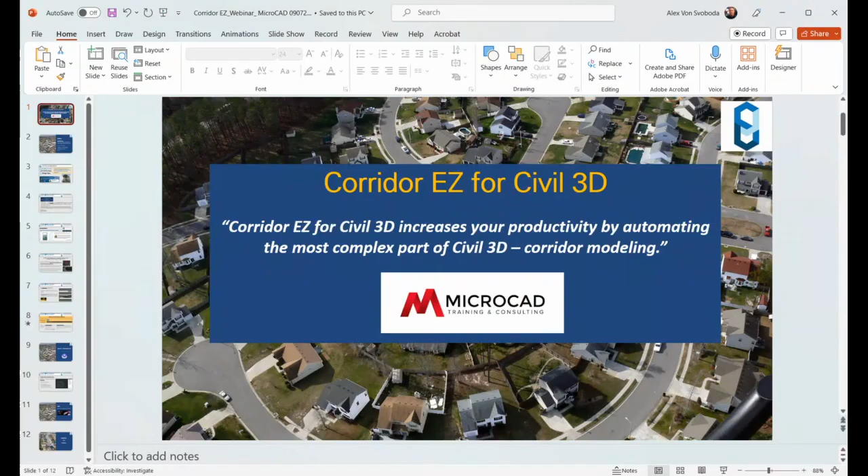All right, thank you Juliana. We're ready to go with this exciting presentation. Let me switch over and hopefully everybody will be able to see the screen here. You can confirm with that. I'm going to go to full screen right now. Yep, you got it? Okay.

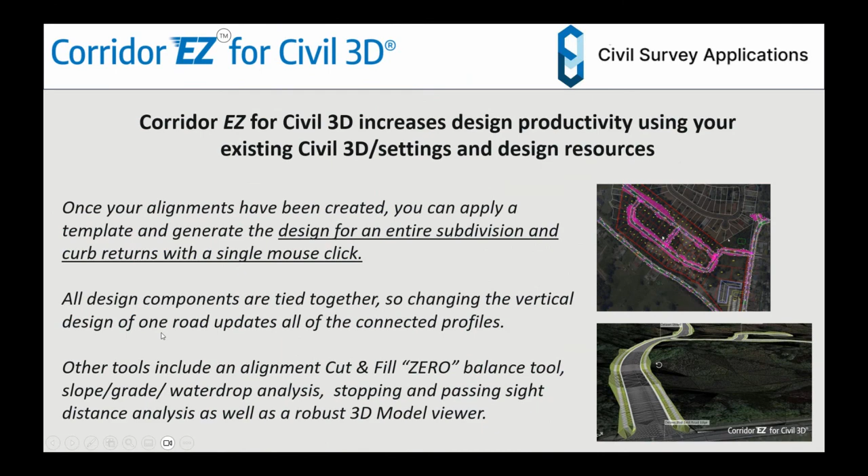The big thing is if you've got multiple monitors, you can place all the different screens - your profiles, cross sections, your 3D rendering, all the different screens - and work and see as you make changes, see everything update directly from that. So in our model viewer, it does real-time visualization as you do your design.

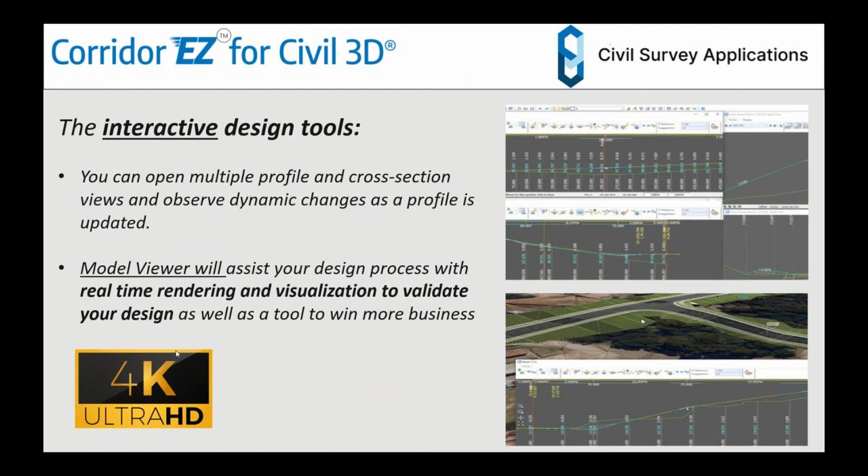One of the newest things we've just added here is our software is 4K monitor compliant. So all the dialog boxes and things will react properly in a 4K environment.

So again, you can go through here and make changes in CorridorEZ, have everything update automatically. That's the power, so it works just like Civil 3D.

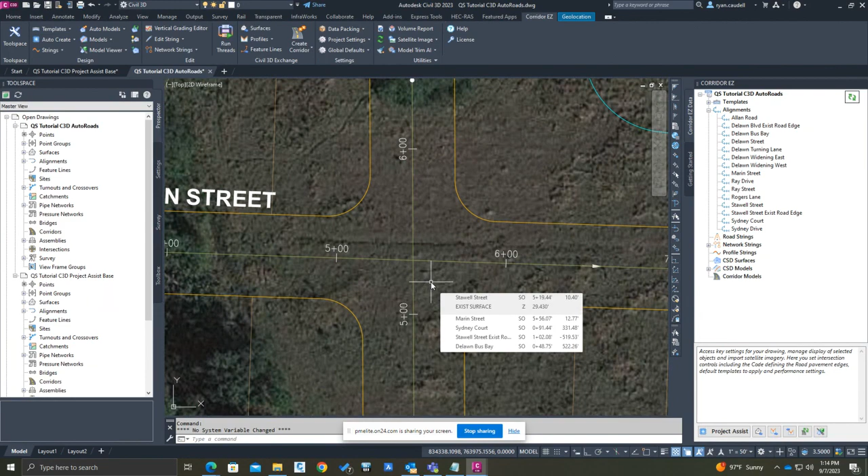As we talk about the alignments, some key things about the way the alignments need to be configured: if you're modeling a T intersection, you would have your alignment basically going perpendicular to the other main road alignment, or in the case of a four-way intersection, two crossing alignments. Those are the requirements for the software to be able to model your intersections correctly.

Some other items would be such as, I've got a right turn lane, and you'll notice that in the alignment name, I'm calling it a turning lane. I've got a bus bay, and if I hover over that, you can see that I'm indicating that alignment as being a bus bay. So you just call out the alignments as they are.

I'm going to go ahead and give you a quick example before we get to the Project Assist part of the software. Over to the right in the tool space, as I was saying, you can right click on the main heading here, and you'll see that you've got drawing settings. You've got a place to set your Civil 3D styles. I can keep going down to the bottom.

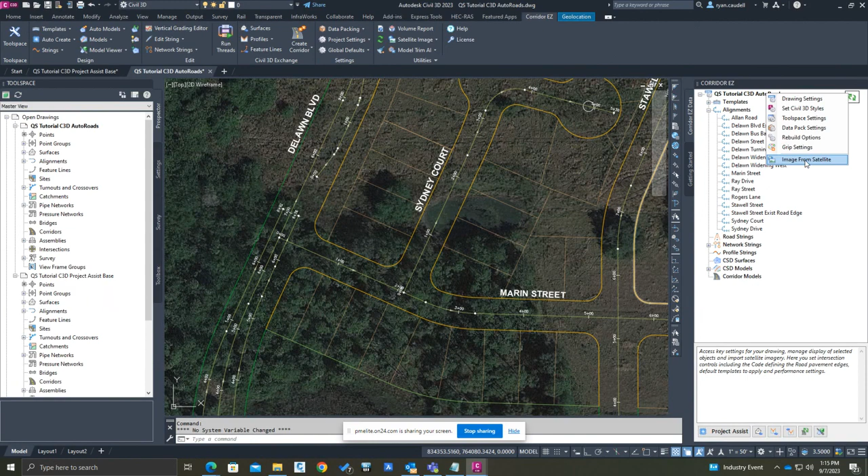You can even import Google imagery, Bing imagery, or even if you have a Nearmap subscription, you can plug that in and pull imagery from that as well. So that's actually where I got this image in the background.

Now the next item that you would normally think about is your templates, your cross sections of the roads. Similar to Civil 3D, where we've got basically where we would create assemblies, this is the same representation in CorridorEZ as templates. So as I kind of go through the templates, I'm getting a nice preview.

If there's a template I need to go and modify, I can right click, edit template, and wait for the window to pop up. There's so much you can do in here that, again, this is kind of a high level presentation. So we've got pretty much 4 different areas that you can look at in this window. We've got a left side and a right side, basically to build out your left and your right of the template. All the controls to building the template out is here on the right side.

You've got create section, which would be your pavement. You can create curb, which would build out your curbs. You've got daylighting conditions left and right. You've got template options. There's so much you can do here. You can access all your different templates also from this window, or you can even click through each one.

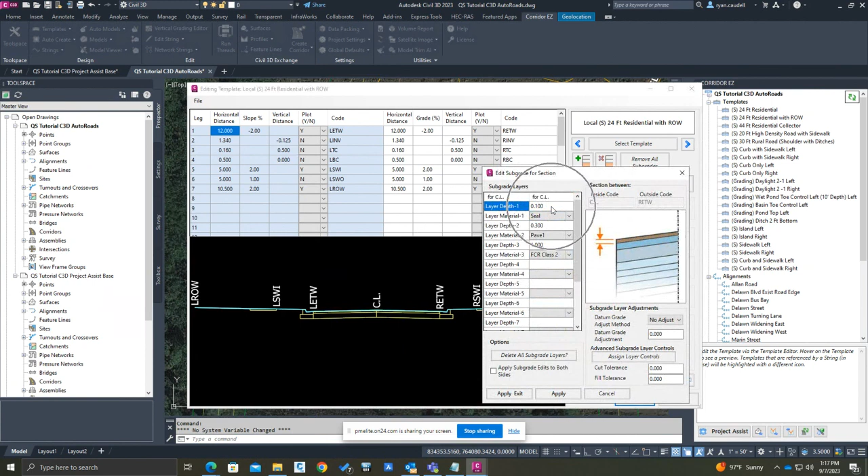Probably the last thing I'll point out here is that you can also right click and do stuff like edit the section. So now you're editing the vertical information on this template. You can assign materials, and this is completely customizable to the company needs and the standards that they're in, in the region that they're in.

To learn more about this, if you install a trial of CorridorEZ, keep an eye out for these little icons here that look like an old video recorder. That gets you to all the e-learning on the specific tools that's in here. So I'm going to go ahead and cancel this.

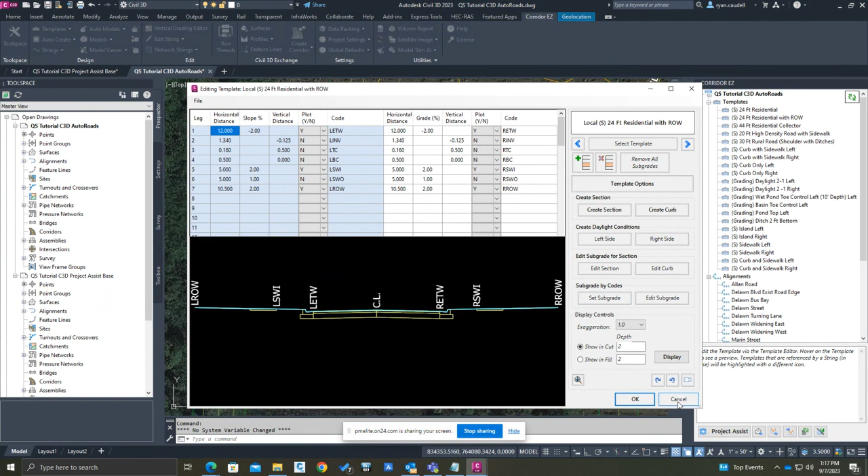Now the next item are the alignments. You can see in the tool space here I've got a set of alignments, and as I hover over them, you can see they highlight on screen. They match the same list of alignments you see in Civil 3D because they are the same, so you've got the same list.

If you came after and created an alignment in Civil 3D, we've got this refresh button in the tool space that you can click, and it'll pull that back into the CorridorEZ tool space to work with. Now I'm going to go ahead and create a street, so if I right click on this particular alignment, I'm going to go to Create Road.

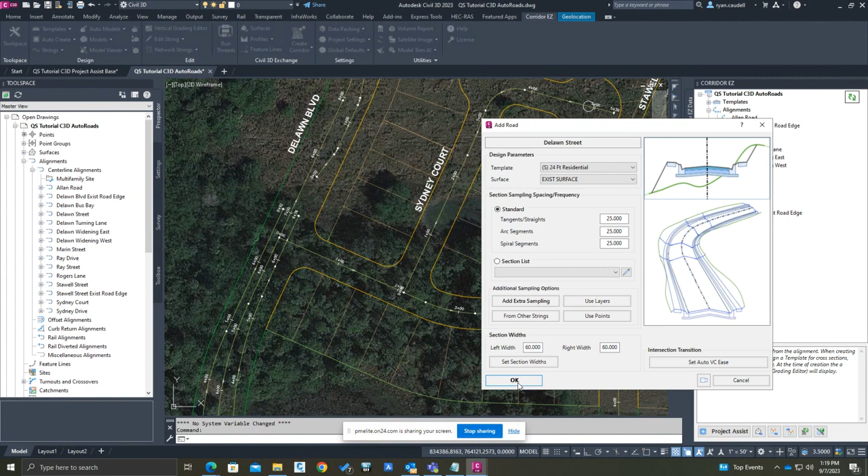You can see we've got that same library of templates. It's going to base your vertical design—you're going to get a best fit profile that's utilized off the existing surface. I'm just going to go ahead and click OK, running with the defaults.

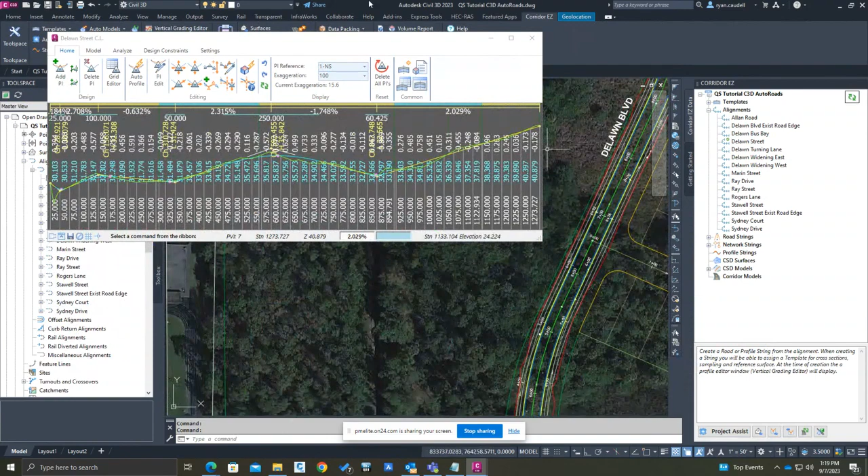As soon as that's generated, let me scoot stuff around—this is the fun part, like putting a puzzle together. There we go, so I've got a road string. A road string is tying together all the codes that were used in the template.

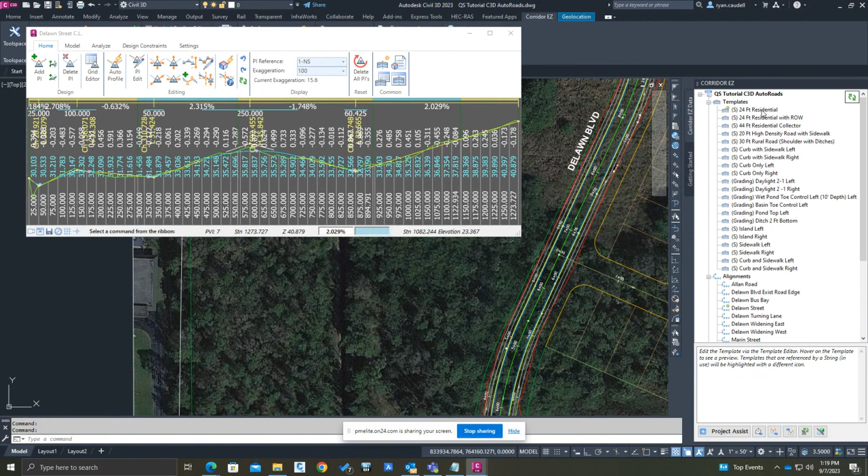When we talk about codes, you can kind of see them in the preview. Let's see if I can get that preview back. You'll notice there are these codes for the left and right of your template.

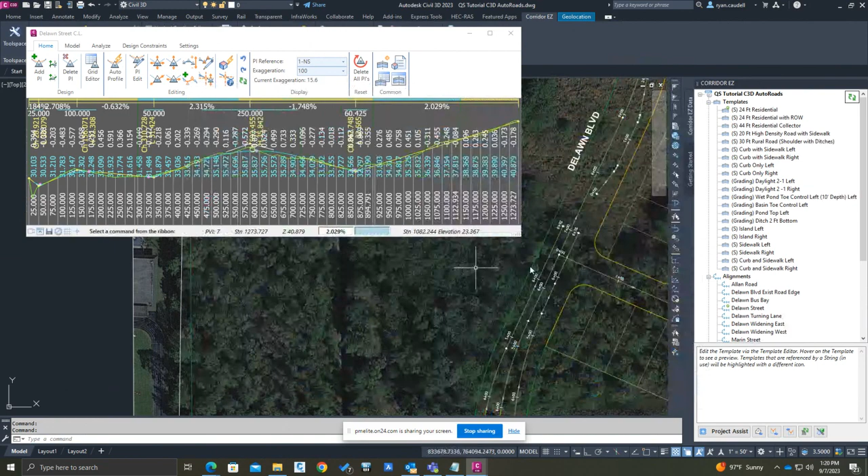And so we've got the center line—the first code, left and right, is an ETW, or edge of travel way. I've got certain codes turned off from the preview, but these codes string the line work together to make your road section.

And you can see that you've got your daylighting on the outside. Now if I go through my profile, you can see we've got a tracker—I'm tracking right in that intersection. I can go ahead and raise and lower this elevation, and whenever I place it, you'll see that model is now getting updated.

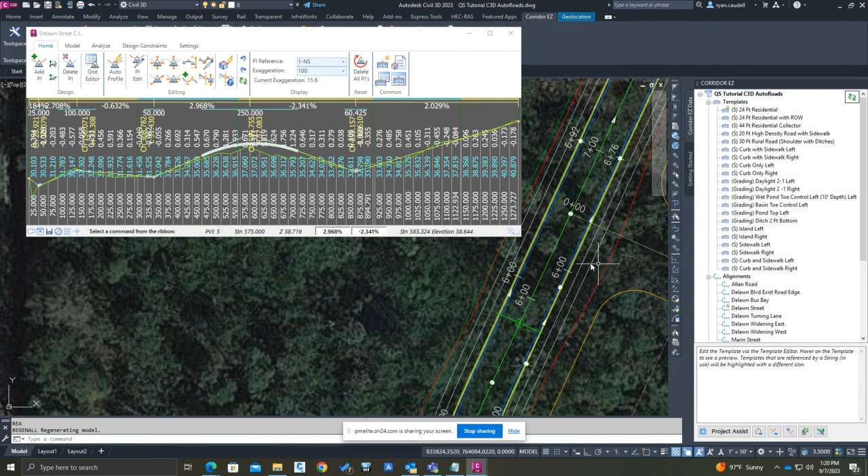With that change, I can also right click in this profile and see the change by section. So as I go in here and modify it, maybe if I get into a cut situation, I can pick that location point there, and you're seeing the changes here.

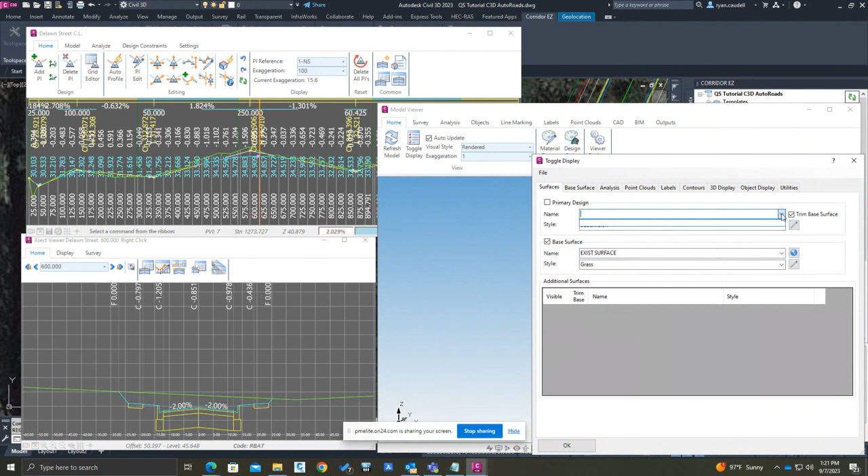Also, another way of looking at this is through the model viewer. I need to go ahead and get that surface—we have a surface being generated off the road. Let's go ahead and rebuild it. You'll see the contour show up here.

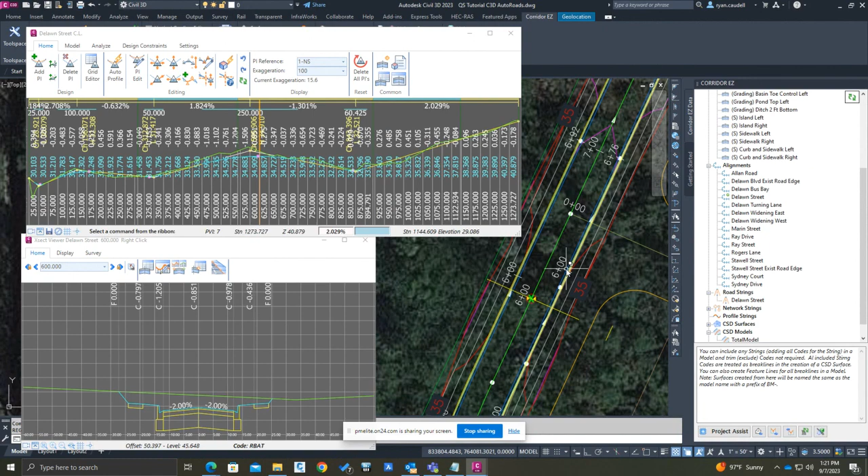So when I go back into the model viewer, we can have this open at the same time. Go ahead and turn that model on so we can see it—that's the road design we've got going on here. And if I raise and lower the model, if I create a fill, you see that even in the model viewer it raised everything up. So we've got a dynamic surface, and that includes even at intersections.

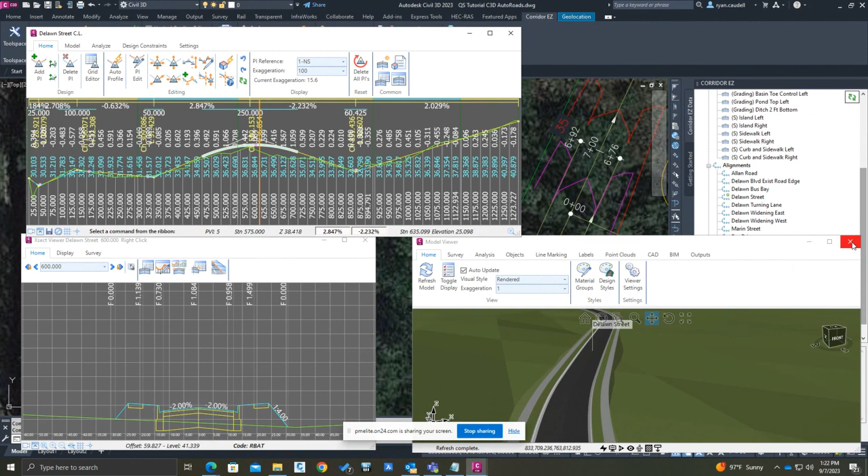I'm going to go ahead and generate one other road here real quick, and then we'll go into Project Assist. So if I get into Create Road, we've got another road design.

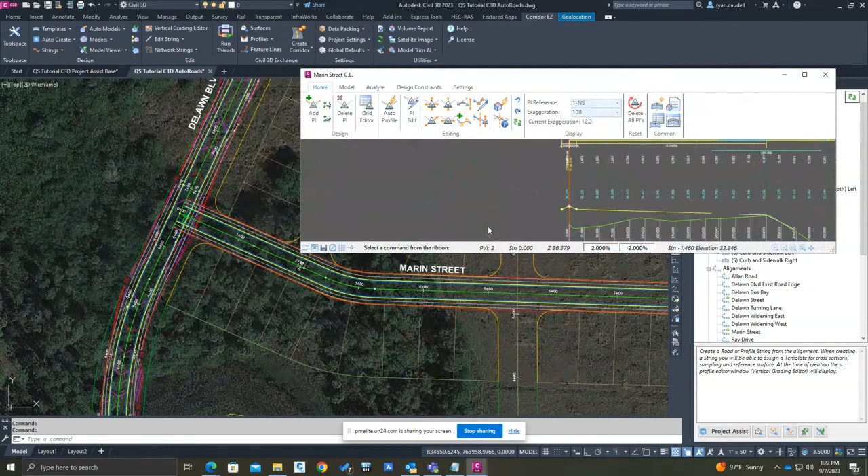At this intersection here, we can actually see that if I was to pull this other road, they would be linked together as well. But let me go ahead and also put in the intersection real quick.

So if I go in, that's going to be what we call a network string curb return. I can choose to do one curb return at a time. Close that vertical grading—all right, so we've got curb return.

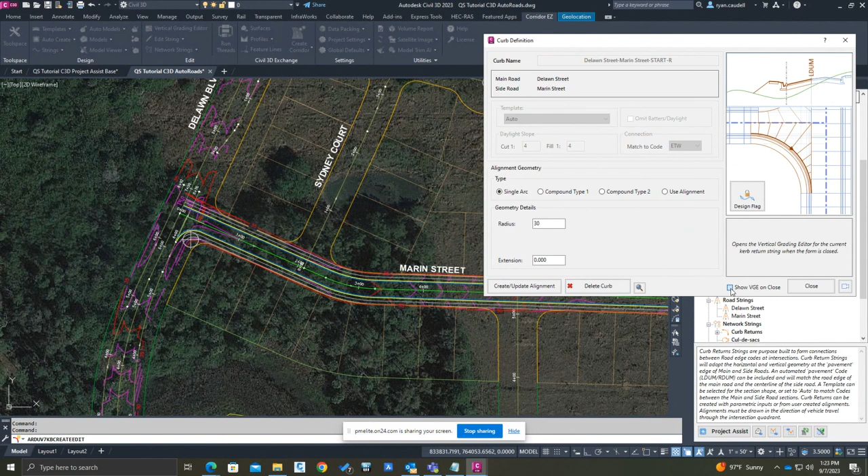So if I want to do this one quadrant right here, I can set my radius. You'll notice how it's creating the alignment and doing a design at that intersection. And if I wanted to see it in the vertical grading editor, I go ahead and tick that box on, and I can see how that intersection is tied to these two roads.

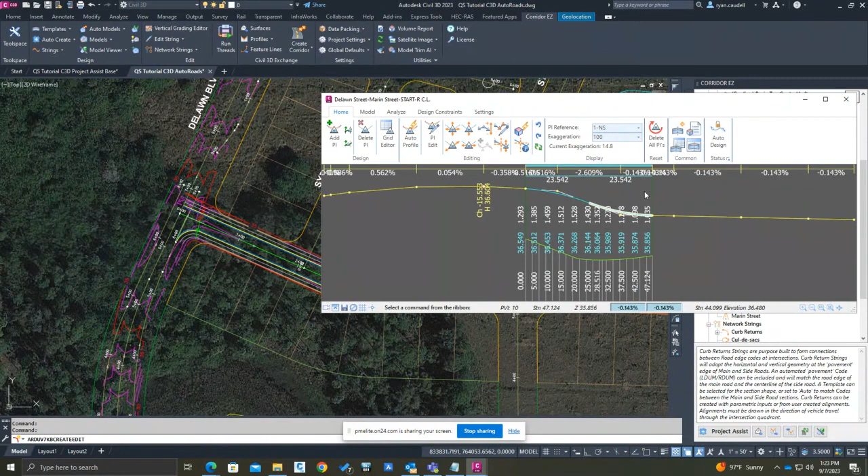Incoming, outgoing road at that intersection. And as I move my cursor around, I can actually see that tracker in the plan view of how that's going together. Now if you've got a lot of curb returns, then we could do auto curb return.

I'll find out where you're at. Oh, I'm still looped in the command. Sorry about that, let me get out of the command.

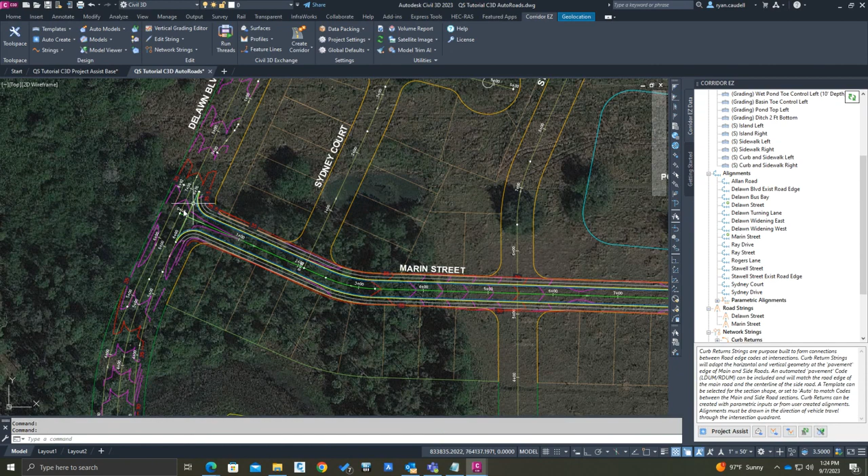Apply my radius so I can see it built that in. And if we take a look at that again in the model viewer, you've got a clean intersection here.

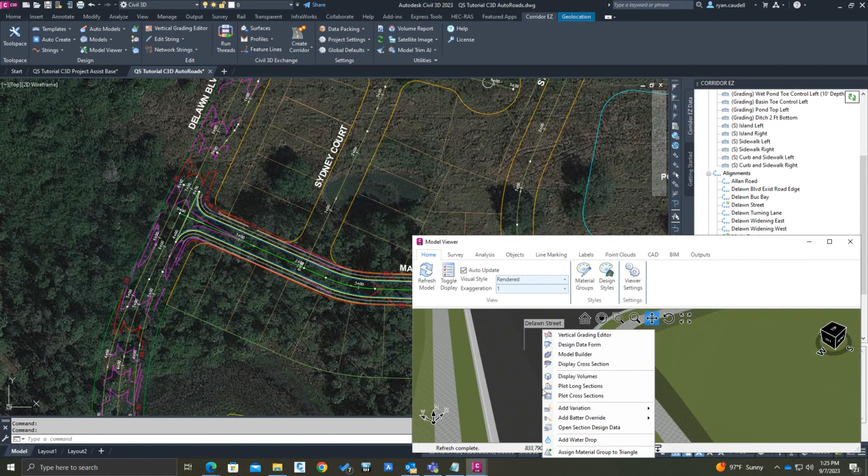Some of those water drop features, you can apply a water drop even in the viewer to see your high and low points. You can even go and access your profile information just by right clicking in the viewer, so you can get right back to your design.

If you want to get to the cross section, just right click away and you've got access to the cross section. Just to open up your mind a little bit, you can even right click in the section view, and you've got variations basically for targeting.

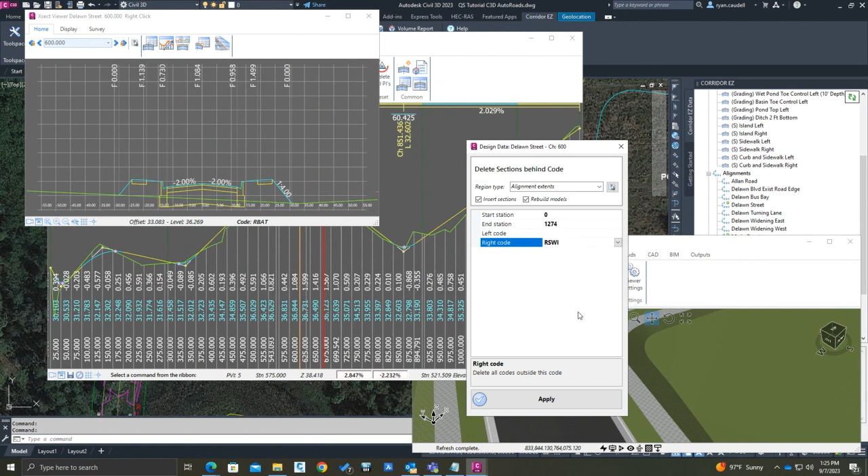If I wanted to delete the sidewalk on the right side, I can go ahead and say anything past my sidewalk end code, I want to remove it. You see I just dropped off that entire sidewalk, and there's the model that took that sidewalk out. So a lot of power that you can do in this.

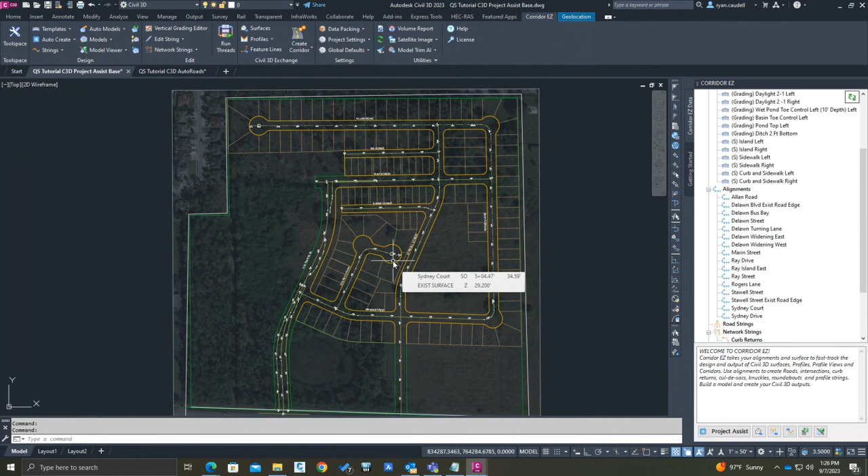Now this was just 2 roads, but let's go ahead and look at this as a mass project. I'm going to jump into Project Assist, and we've got all kinds of stuff going on in here. I want to build out my 2 cul-de-sac areas in this particular demonstration. I've got a widening, bus bay, right turn lane, even have an island. So let's go ahead and build this out.

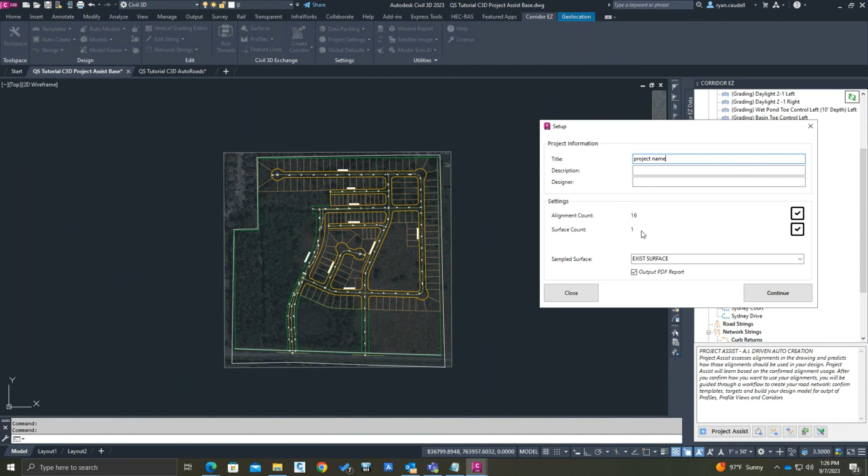So I'm going right into Project Assist. Here we can go ahead and plug in a project name. You can basically fill this out, and that's really for a PDF report that's going to be generated after it's done building. You'll see that it's finding that there's 16 Civil 3D alignments, and there's 1 existing ground surface. That's the surface. I'm just going to continue.

At this stage, Corridor EZ is looking at each of the alignments and then trying to assign a design type for each one. This is really the AI component. As you start to assign different tag words like widening, turning lane, bus bay, and you start assigning what type of an alignment in the design process you're going to use it as, all of this is getting stored in the memory of the machine learning portion of Corridor EZ.

So I'm at a point now where I don't even need to select anything, it's already selected. I will say though, as you hover around in here... well, I should see everything highlighted on the screen. There we go, now the highlight is starting to happen. You can highlight those different areas to see what alignment you're working in.

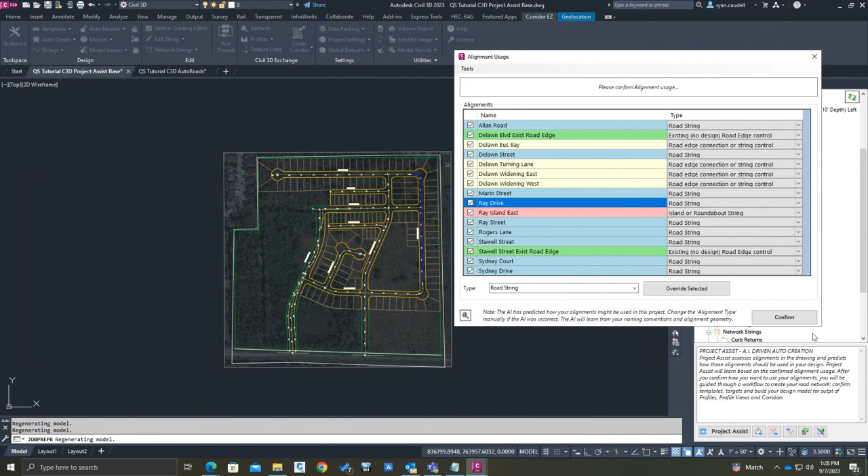I'm going to go ahead and confirm. So I made no changes, I literally just clicked through 2 boxes, no changes.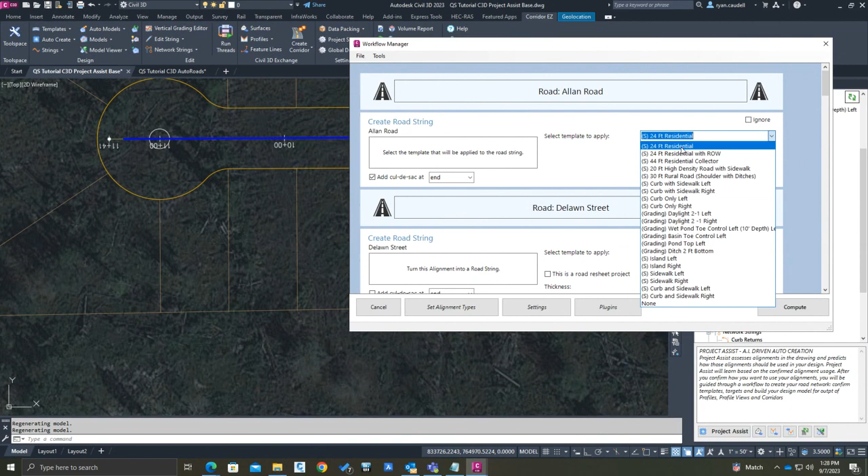So now I can go through, and it's starting kind of alphabetical order with the alignments. What do I want to do with Allan Road? Well, I know that I've got a cul-de-sac at the end, so I'm going to add a cul-de-sac. It's going to be at the end of the alignment. We have the ability here to select a different template if we wanted to. And I'm just going to continue to go through the process here.

Which really there's only one other cul-de-sac I want to get to. Now I do have these widenings, and with widenings you have a lot of other different controls. Right now it's just going to take your template and maintain that road crossfall and hit this alignment, which is pretty typical.

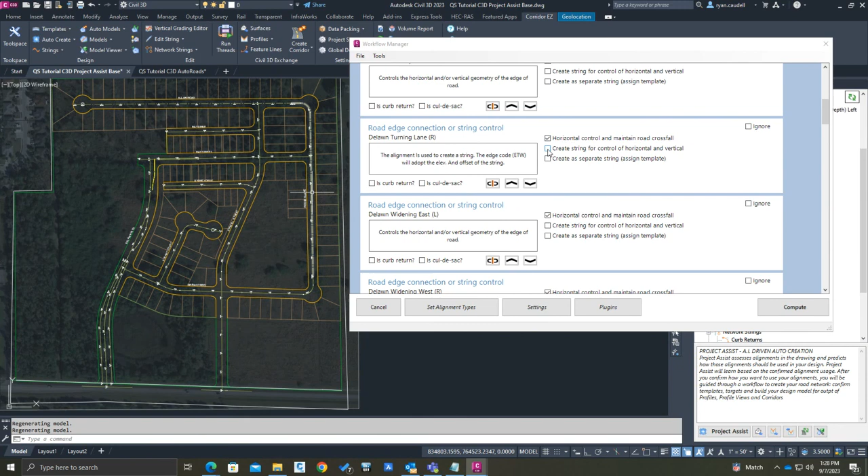But you can actually go through and break it down further by creating another profile string, so you have something else that's now creating a horizontal and vertical control for you. Or you can even go in and apply a whole template on it, something separate. So you can get to really any type of design need that you are looking for here.

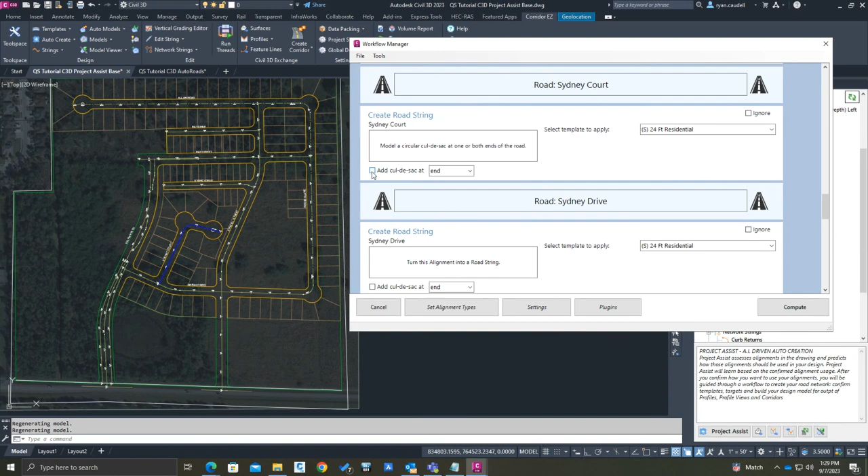I'm going to keep it set to that. And let me get to my Sydney Court, that's this road here. We want another cul-de-sac at the end of Sydney Court. There we go, scroll down toward the end.

So we're going to apply a 30-foot radius on all intersections. We've got another option here that is create all curb returns as saddles.

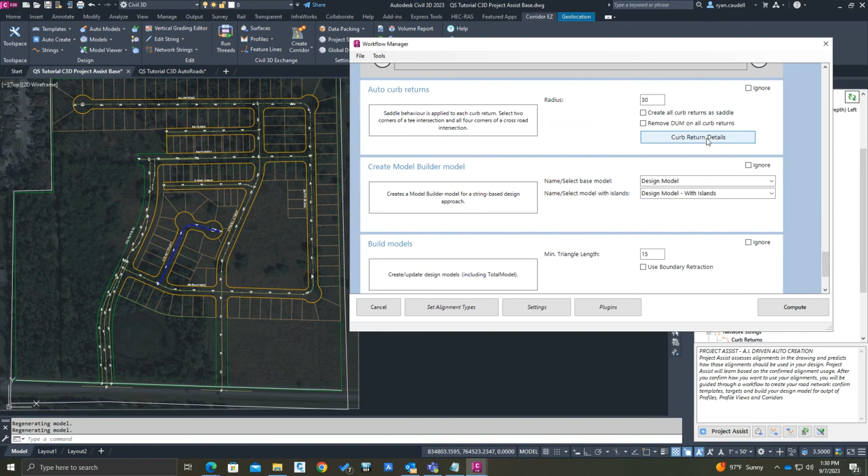This is the same terminology in Civil 3D as what we call crowned roads. For all crowned roads, we can just tick this option. Or if you have an area that's going to be crowned, but everything else stays as is, with a primary and secondary road tying into it, we can choose this option and specify which quadrant we want crowned. So you can go in and specify exactly which intersections you want crowned.

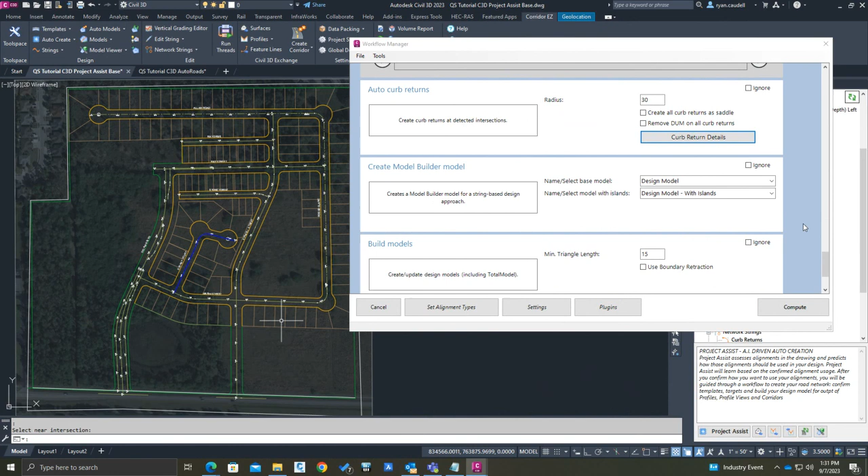We're going to get 3 different surfaces built. You always get a total model surface, but then it's going to apply a design model surface to incorporate all the cul-de-sacs and any odd parts related to your road. Then the islands will use that surface to drape from and produce an island surface. So pretty wild that we're just starting with alignments and a natural ground surface, and we get 3 surfaces out after this step, along with all the profiles we can then start designing, including all the vertical design.

We can also go ahead and open or attach a plugin. In this case, we've got one plugin that's opening the model viewer. So when it's all done and built, the model viewer will open up and we can take a look at what the design looks like. I also want, when the model viewer opens up, to pull a draped image onto the natural ground surface. So I can go here, pick that surface up, and go ahead and compute.

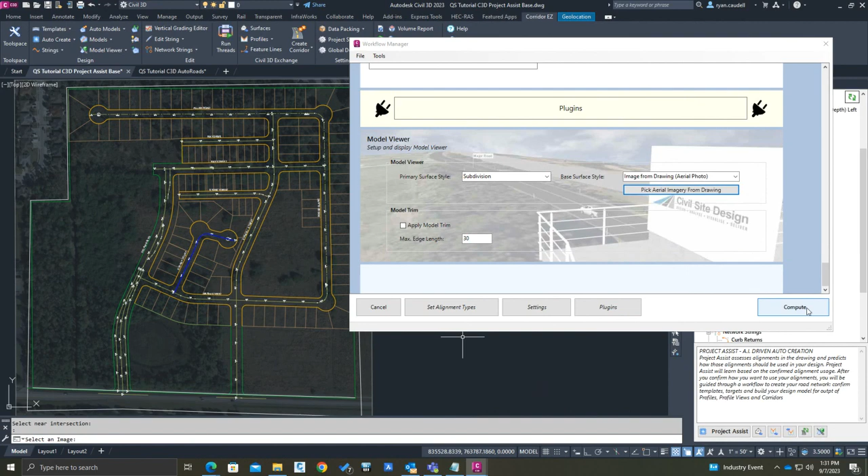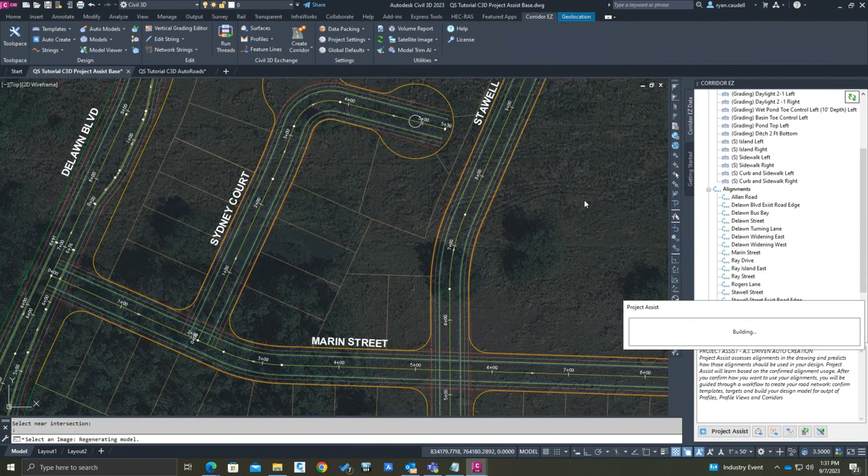Let me zoom in here so we can see all the different things happening. As soon as I hit compute, you'll see it going down the whole workflow from Allan Road alphabetically. When it gets to something like Delawn Boulevard, it's going to run that cross section through it. It's then going to stretch the edge of travelway code to match all the widenings happening, which is the right turn lane. We've got the bus bay, and then the widening going into Delawn Boulevard.

Then it's going to start cutting out all the intersections. One thing you'll notice here, and you'll only notice it once you work with the software, is if you look at this intersection, you can see the edge of travelway, that line running on the edge of Delawn. That means in this case the main road is crowned and your secondary road stops right there at the edge of travelway of Delawn.

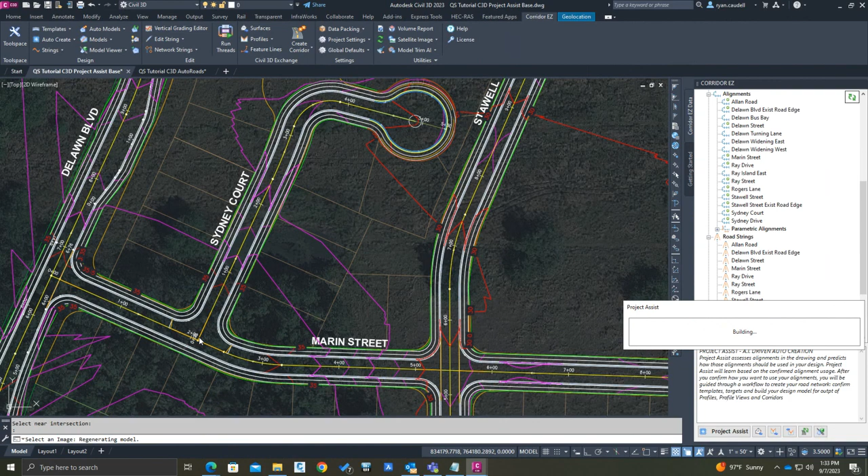If I look over at the Sydney Court intersection on Marin Street, you'll notice how, to get back to it, the report popped up. In the report, as you're scrolling through it, you can compare what it did in the design, and you have the ability to click the link to each e-learning video so you can understand how to perform the step without using something like Project Assist. So the report's a great feature to have.

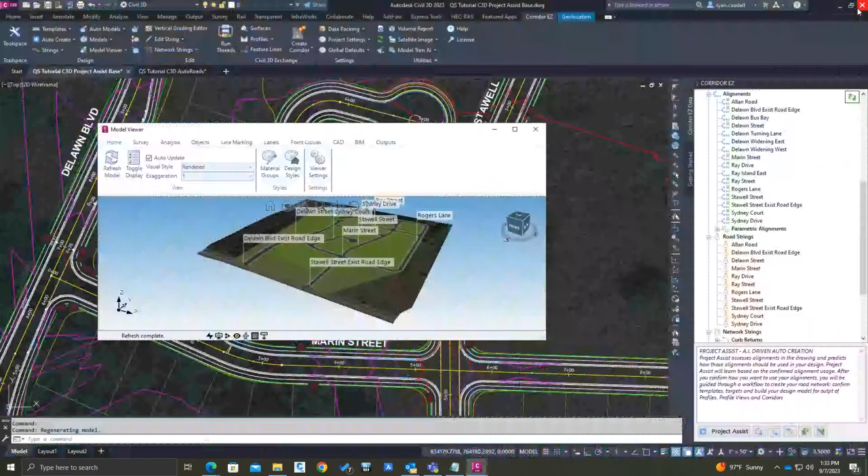I'm going to go ahead and close the report. We've now got the model viewer opened as well. You'll notice, unlike the object viewer, the model viewer is really nice because it actually shows you where your alignments are.

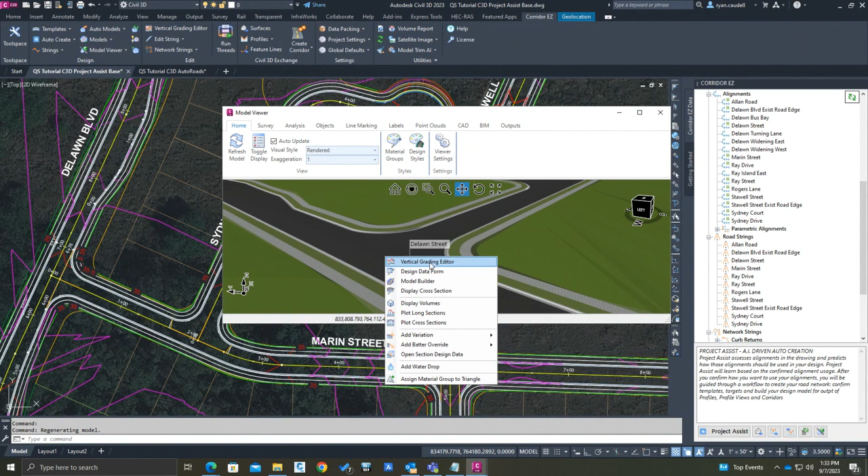It's also nice in a lot of other ways, like the right clicking. If you need to see a cross section of the road, say if I go over here and want to see the cross section of that road, I can display cross section and see exactly what's going on in that design.

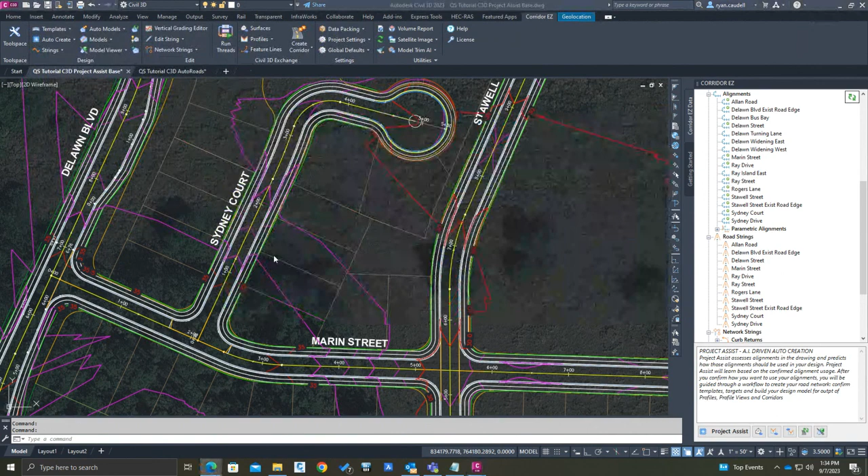Now that we've done all of this, you can go into editing any profile you need to continue your design with. There is so much power in this. I used to think I would just use, at the time it was Civil Site Design, to get me to where I can just get my profile into Civil 3D and then continue to edit in Civil 3D. But there are some things to note in here that are a little different.

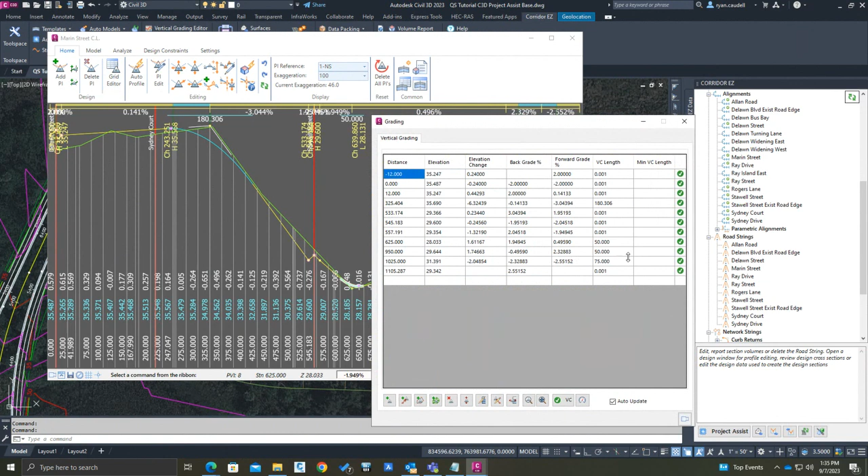There are similarities too. First, the similarity is you've got a grid editor, something we're all pretty familiar with in Civil 3D as well. We've got basically the same type of tool to see, they call it distance, but for us it's station, elevation, and then you've got your slopes.

But in here you've got something like auto profile. We don't have this in Civil 3D. You can actually match certain parts of your profile to match on a surface, plus constraints, which we can talk about another time, and profile strings. So there's a lot of stuff you can do here.

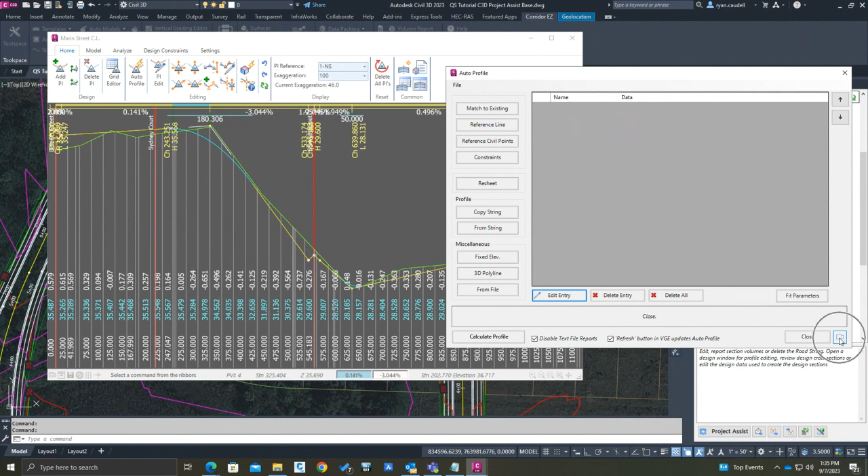Also, note, if you're exploring these options on your own, you've got that button in the lower right corner to get into the e-learning.

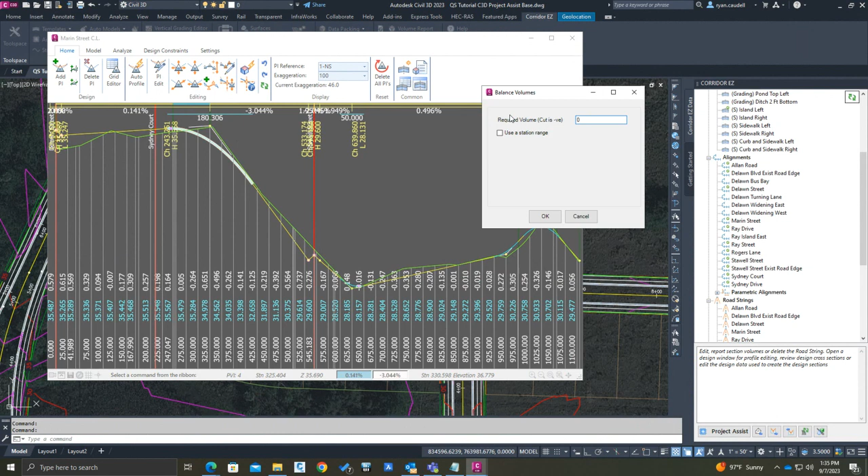I would also say if you wanted to do an auto balance, maybe you design out your road and want to end up with no cut or fill. I could say I want no cut or fill in this area, and Corridor EZ will go through and redesign, considering the depths of the sections, making the adjustment needed for a balanced road with that ground.

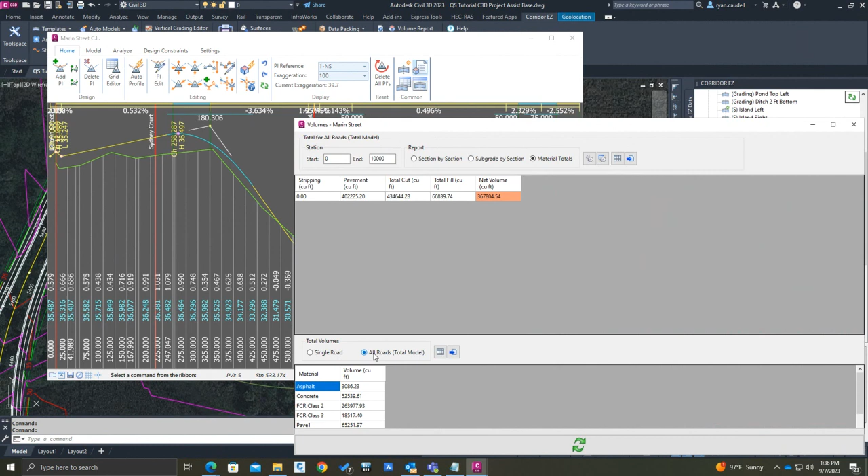You can also get into a report here, a volume report. This report right now is by section. You can also click to see a material report based on this road. Down toward the bottom, you can even look at a calculation that includes all the roads, so now I'm seeing the calcs for all the roads.

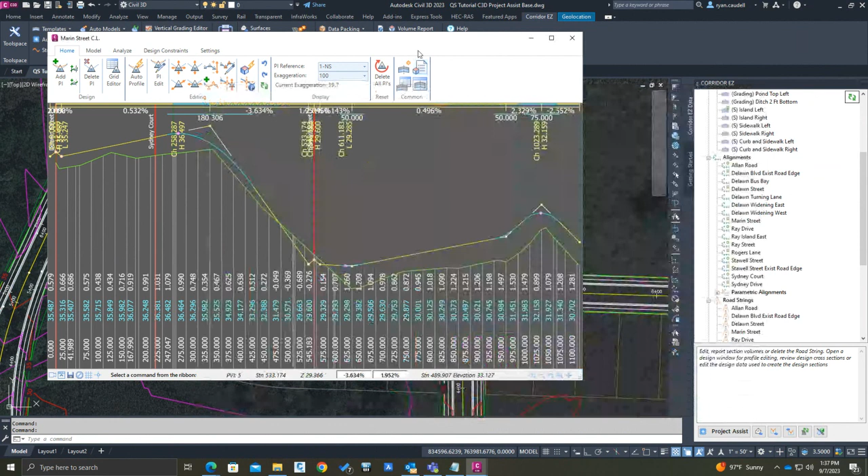This report can be exported out, and right now it says cubic feet. There's one of the tools in here—we should be able to change that to cubic yards. I have to hunt it down, but it might be this one. Yeah, right there, cubic yards. Save settings, and let me close it. If I get back into that report, now I'm seeing cubic yards.

All right, so that didn't take too long to get to this point, but now we're ready to really look at how we get this information back over into Civil 3D.

So the first thing would be, maybe you want to carry a surface over into Civil 3D. All of those tools to bridge you back into Civil 3D appear at the bottom of the tool space, which is really nice—it put a cluster of tools in here. Say I want to have the surface with the island as my Civil 3D surface, so I'll go ahead and pick that, click OK.

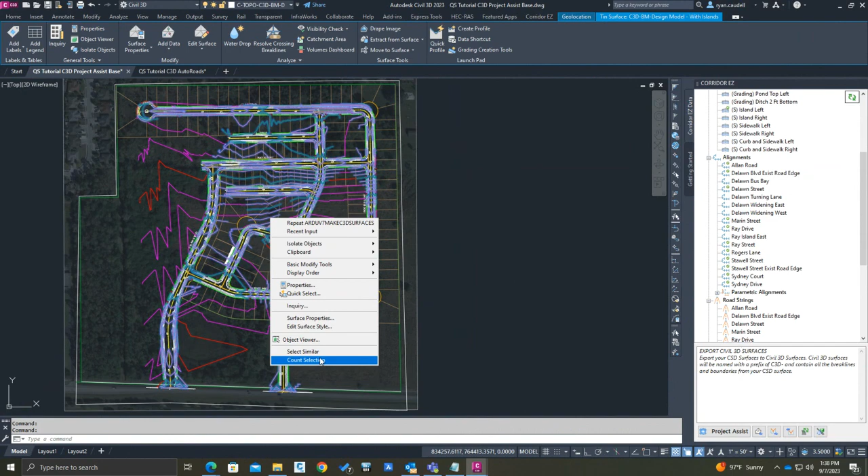Civil 3D just brought that surface in. If I actually look at it in Civil 3D, you can see how clean that is compared to doing it with feature lines, and how long it would take to do it that way. Even with corridors, it just takes a lot of time to do these intersections, and you need a lot of that design done already before you can even get it modeled.

Here, I was able to get a model, and now I can do my detail design. So we've got the Civil 3D surface. The next thing we want to do is export all of the profiles into Civil 3D profiles.

This was another thing I saw years ago, and I was like, wow. Of course now it's improved a lot—it used to just drop them all in, and now we have the ability to assign different styles to everything. It's really powerful.

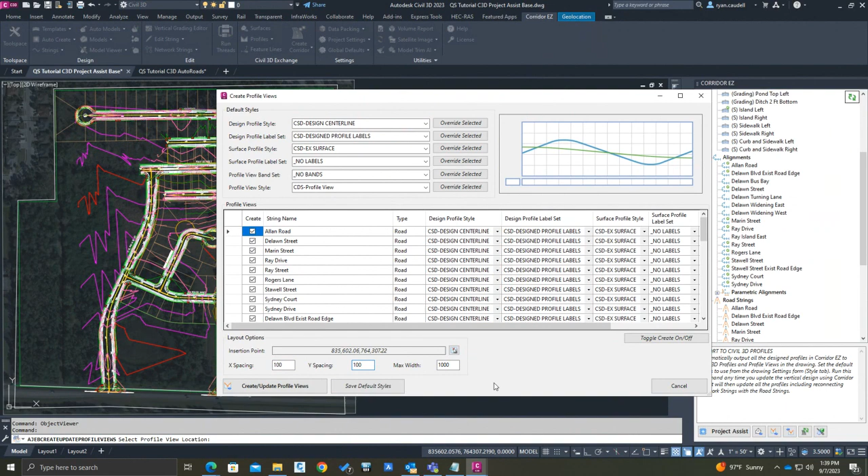I'm going to select an insertion point location, set a spacing between the grids, and click create update profile views. Let that run. All right, it's done, and you can see all the profiles that just kicked in there—I got all of them in there.

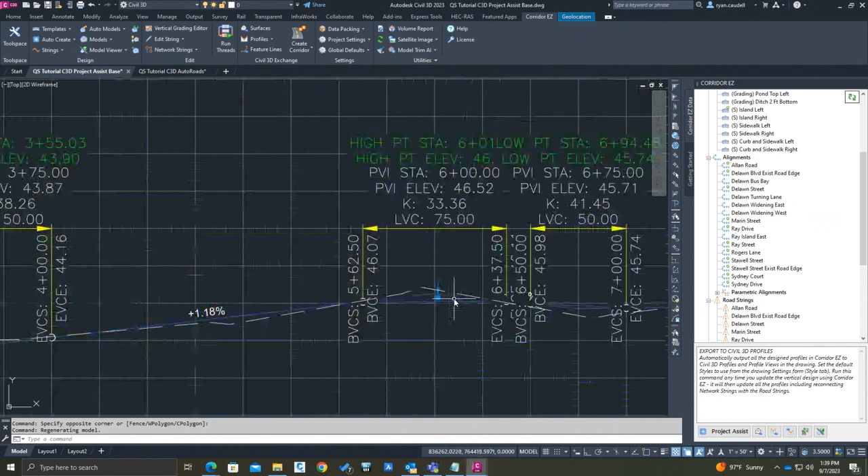And now we're back to Civil 3D. I could just grip edit and do my design in Civil 3D. If you choose to go that route, the next icon over in the tool space takes your Civil 3D design and updates the CorridorEZ design. So you can easily work in one environment, make changes, kick it out, or go to the one you feel comfortable with and reverse it—they work together.

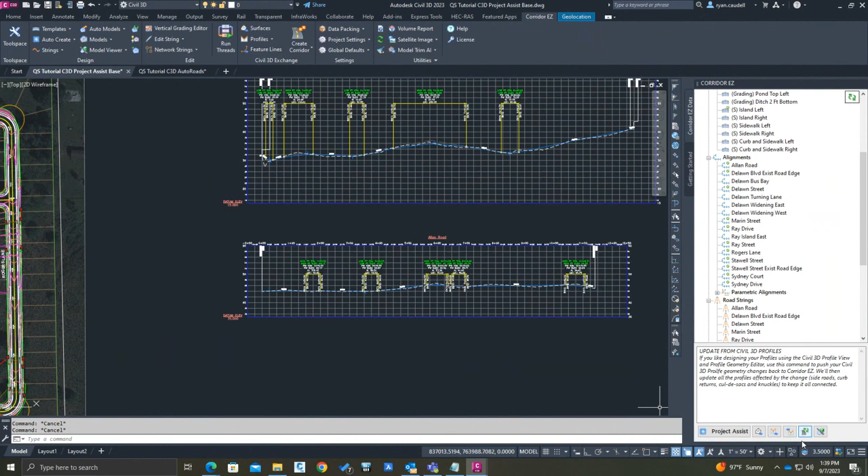Now let's talk about how we get this into a corridor, because that's what people really like to see. You don't have to do a corridor - if you feel like you're getting great performance, everything you'd normally get from a corridor, this might be your stopping point. So even though the software is called CorridorEZ, this may be your stopping point because of the performance. If you do need the corridor, we'll go right into corridor model, create corridor.

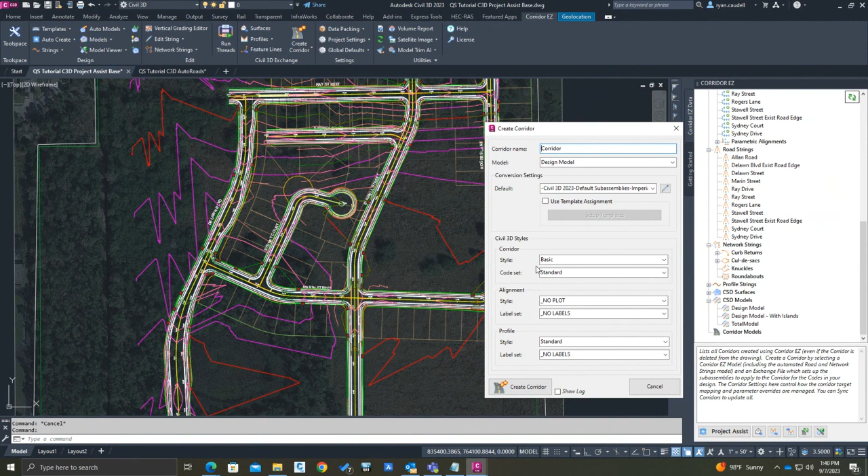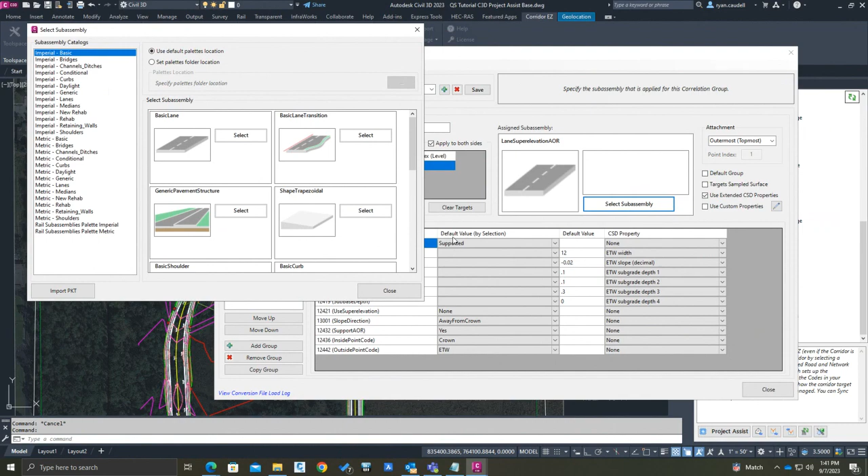Before I do that, since we have a little time, there are conversion settings - this is really where the magic happens related to these codes, the ETW, and how it knows what assembly to use. If you're an organization with custom assemblies, you can assign a code to your custom assembly by importing a package, or packet, and then select it out. But this is pulling from Civil 3D's subassembly library. I didn't have to build this conversion file - it's already provided in the software, so ideally you'd never have to mess with it unless you're trying to customize something.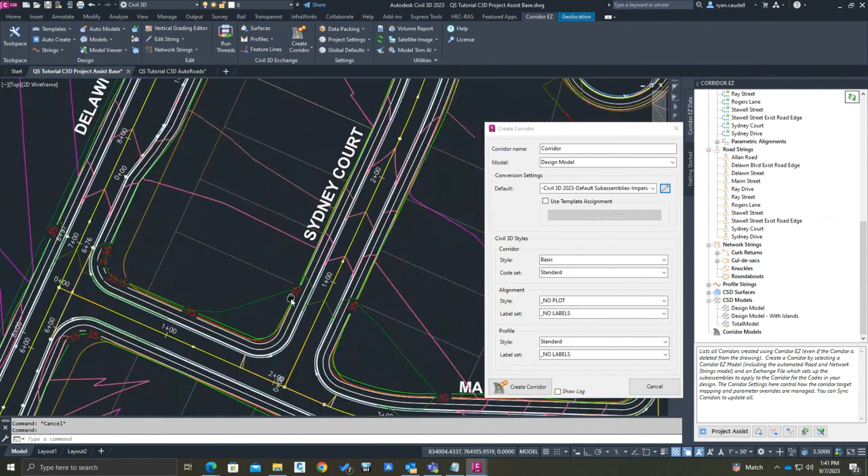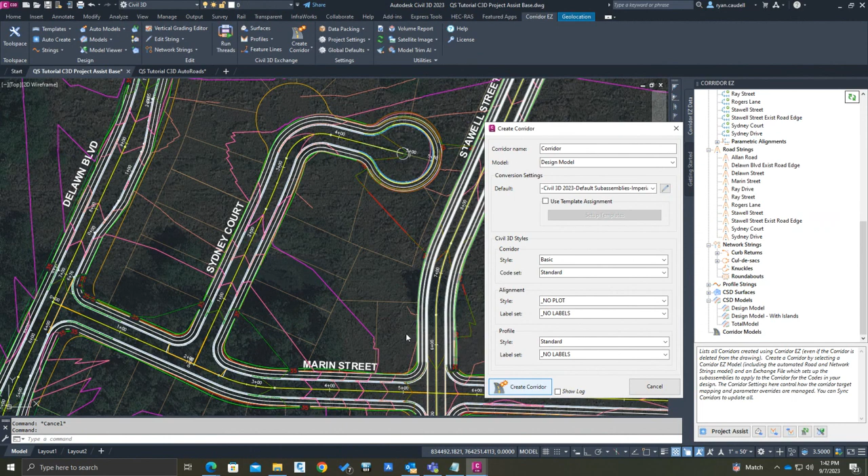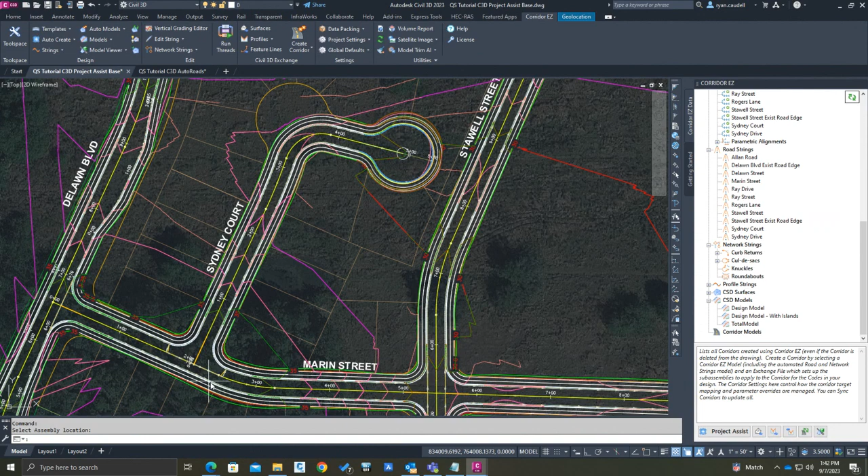So, create corridor - let me get in here a little bit so we can see what's going on when it's creating. There we go. It's funny that I did that because now I need to be able to drop my sub-assemblies off. But if you look at the background, there's an alignment now being added to help with the construction of all the transitioning going on with the corridor targeting and everything. Let me go ahead and drop the assemblies here.

Consider it like this: each region that's being built has its own assembly. So if you wanted to make a change in one region, instead of having a small library of assemblies - which I'm actually very accustomed to having one full road for everything - in CorridorEZ, it breaks it up, and you can make tweaks in one area without affecting everything else. That's kind of a pro, I'd say, over having a smaller library of assemblies, but everyone's going to have a little different take on that. At least you'd have to build them out.

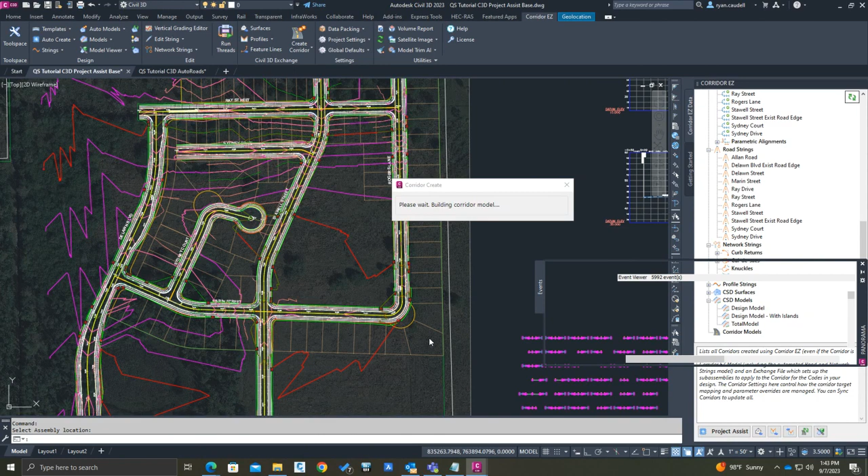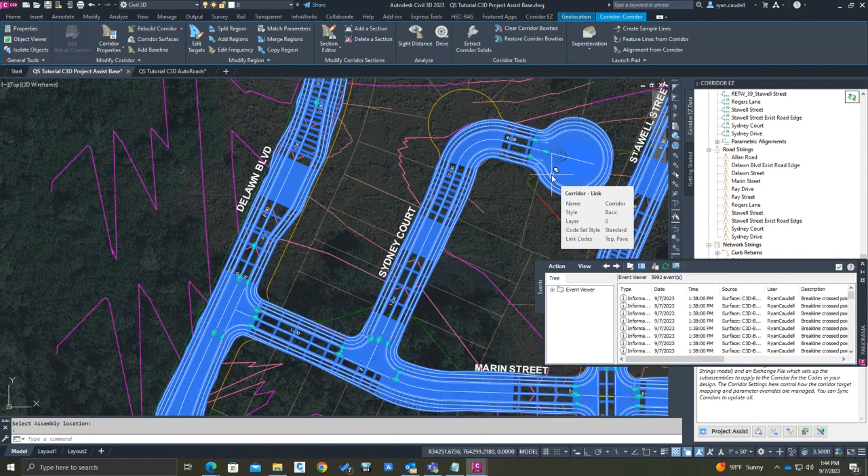So all the modeling's happening right now. It's going through assigning the frequencies based on CorridorEZ and the way that it set up its frequencies, putting all that in there. Here you can see the all-crown road as opposed to a road that's just tying into a primary road. Really, CorridorEZ is building this out the way that you would build it out.

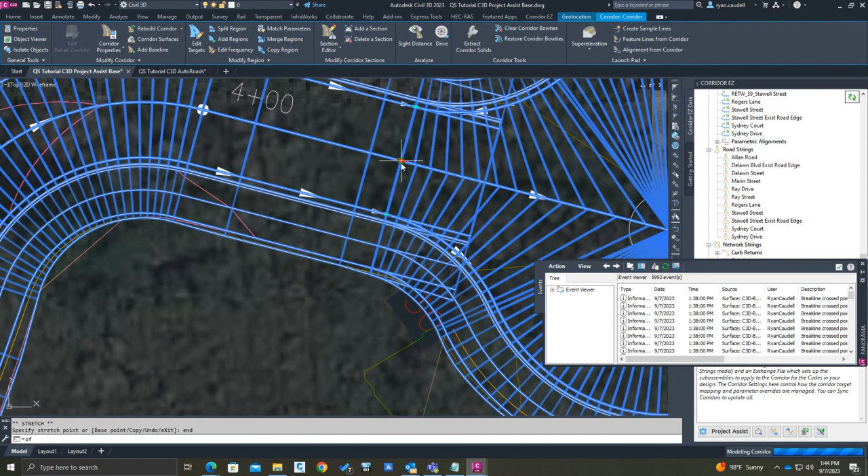Now if you do catch some little issues like this, that's easy enough - you just grip edit and bring that back. So it's easy to make the edit. Bring it back a little bit more here. There we go, so I can just scoot that region back and get it out of that cul-de-sac. That was easy.

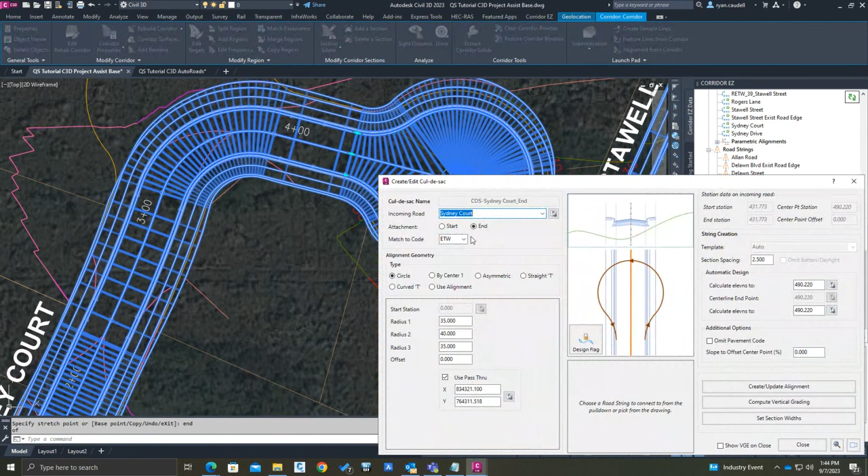Now if you needed to make a change to the cul-de-sac design, you've got your cul-de-sac networks right here - that's Sydney. So I can say, okay, let me edit cul-de-sac, and I'm right into the utility that completely works with this cul-de-sac. I'll pop this up for everyone to look at to give you an idea that there's a lot of different ways you can design a cul-de-sac. And if none of the options here is what you want to do, you can always create your own alignment and then assign it to that.

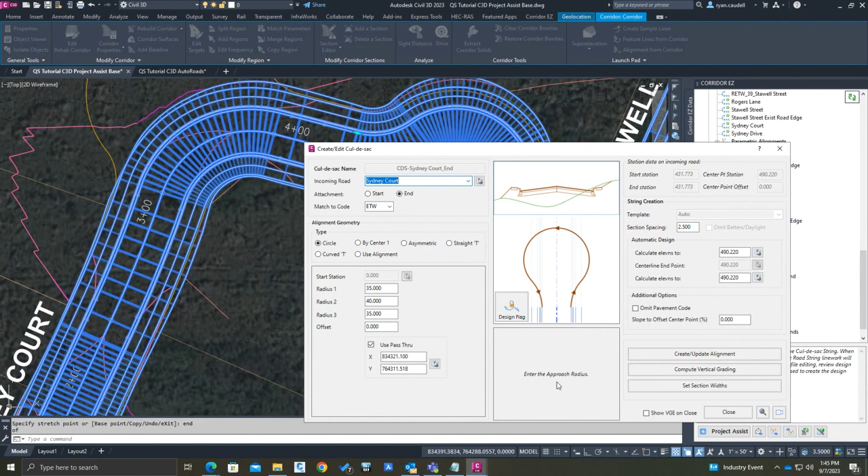You can also go right into the vertical grading and design it. But there's a lot of stuff you can do in here. I'm going to close this out as well.

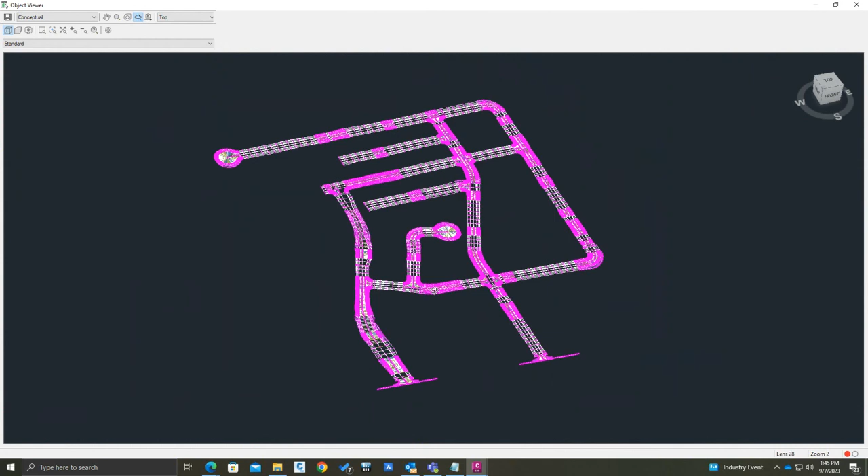Let me go to the object viewer real quick, the old school object viewer. We can feel the delay a little bit here, but everyone likes to look at this up close. But that's your whole corridor model.

It just kind of blows me away with how fast, even someone who doesn't know anything about a corridor, can actually get to this point.

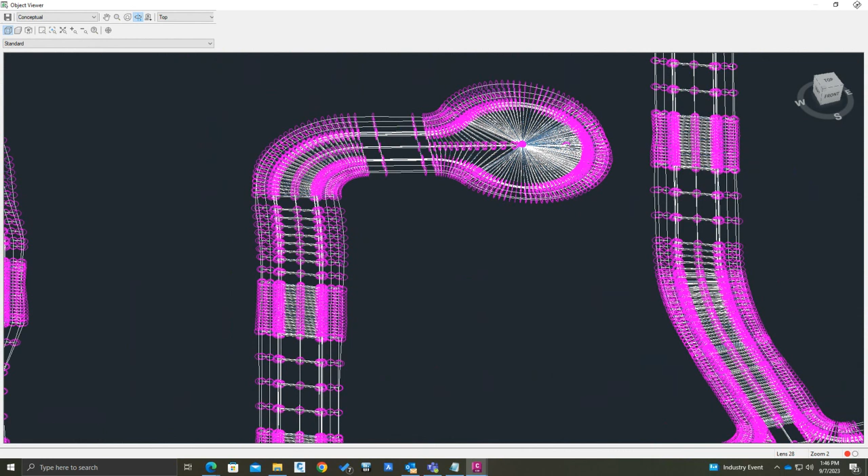And I think the last thing I'm going to open up, just to close it off, is the corridor parameters, because I know if you're a Civil 3D user, you usually like to see what's in the parameters - what is it doing? I got that lag, how funny - you get into Civil 3D and you already feel a lag. There we go, let's close that out.

Get out of there. There we go. Okay, so let me get into the parameters real quick, and then after that I think we can open it up for any kind of feedback.

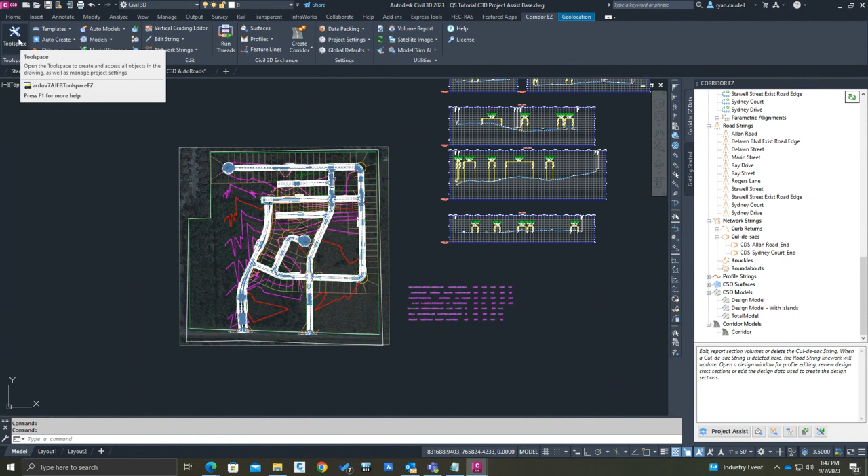So I'll go back and review a couple slides, Ryan. Okay, cool, give me one second here and I'll get this returned to you. Oh, that's why, wrong Toolspace.

Yeah, so here are the properties. I think anybody that does corridors knows the task that it would take to build this out, and how fast it was done in a program that really kind of automated a lot of this for them.

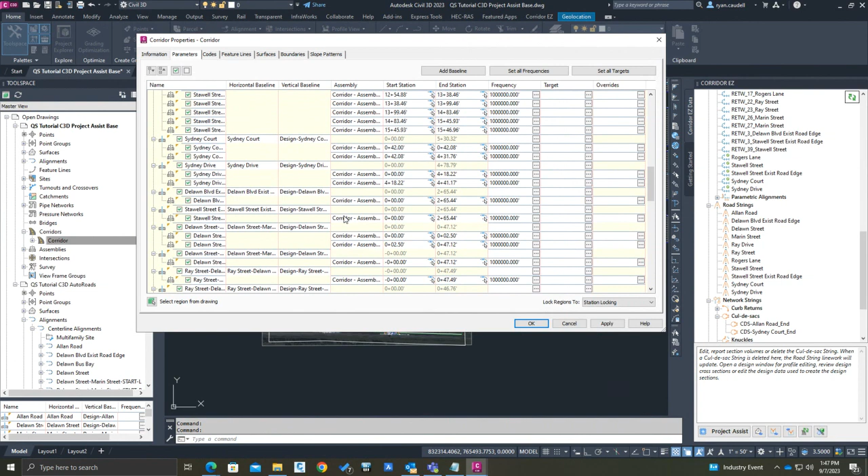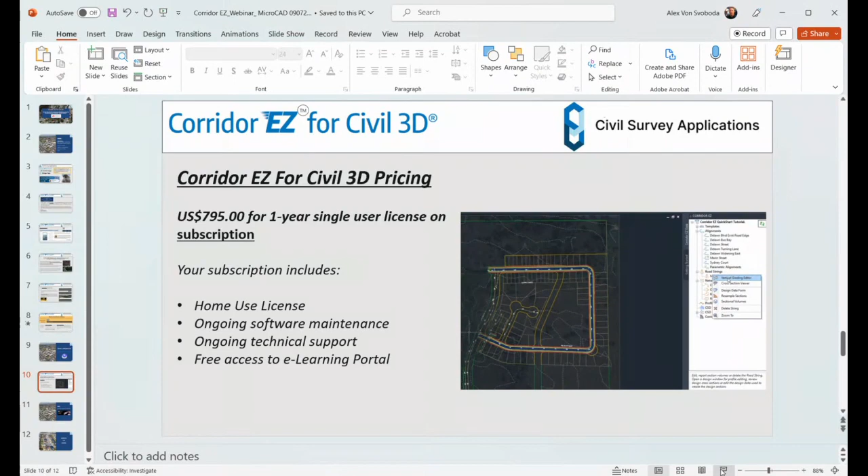All right, well I will stop sharing and pass it back off to you, Alex. Okay, I'll start sharing. Can you see that, Ryan? All yours. Can you see the screen, my screen?

Yeah, great. All right, just to finish it up here, thanks to everybody for hanging in there. It's been very exciting to show this. So here's Corridor EZ, which is a subscription-based offering.

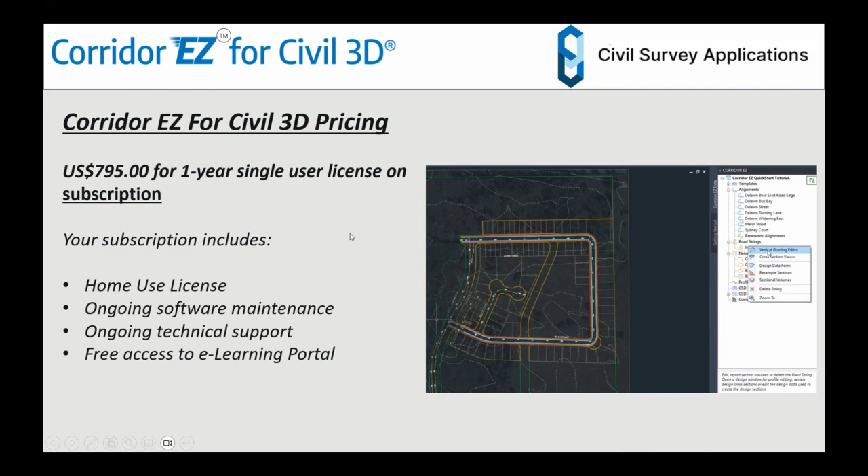It's $795 for a one-year single-user license, and that also includes a home license. So any maintenance or technical support is all part of that. And as I talked about, we have access to that e-learning portal that we use. So that's the offer for Corridor EZ.